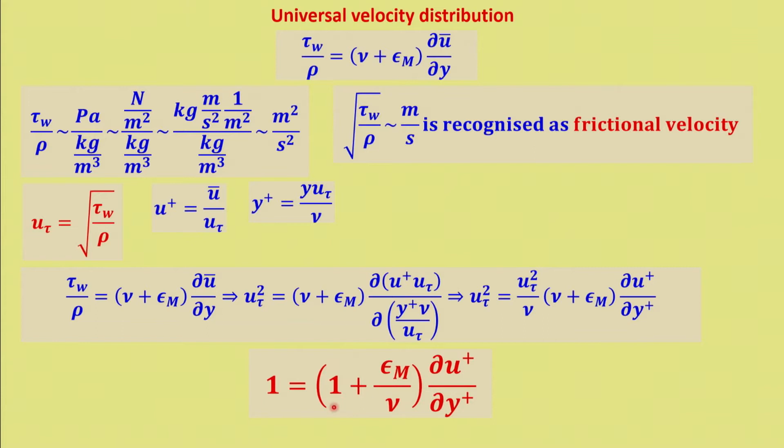Tau wall by rho equals nu plus epsilon m, del u bar by del y. So we replace tau wall by rho by u tau squared, and del u by del y in terms of u plus and y plus, and we got this relation. The first term represents the laminar shear stress and the second term represents the turbulent shear stress.

For laminar, we took a two layer assumption. We took the laminar sublayer and took 1 equal to du plus by dy plus, integrated that, and got u plus equal to y plus.

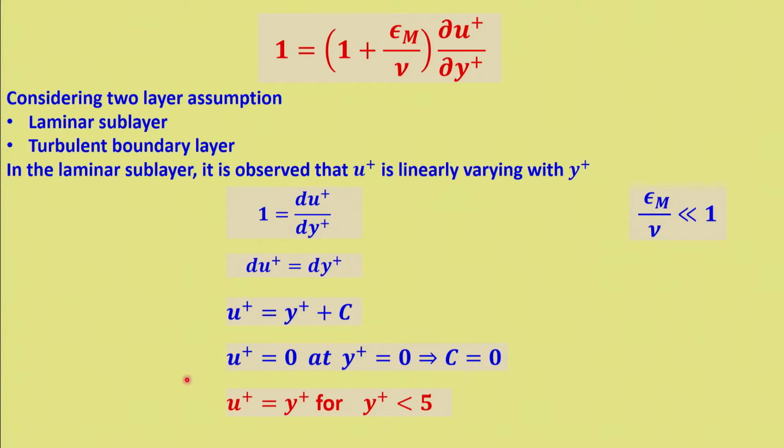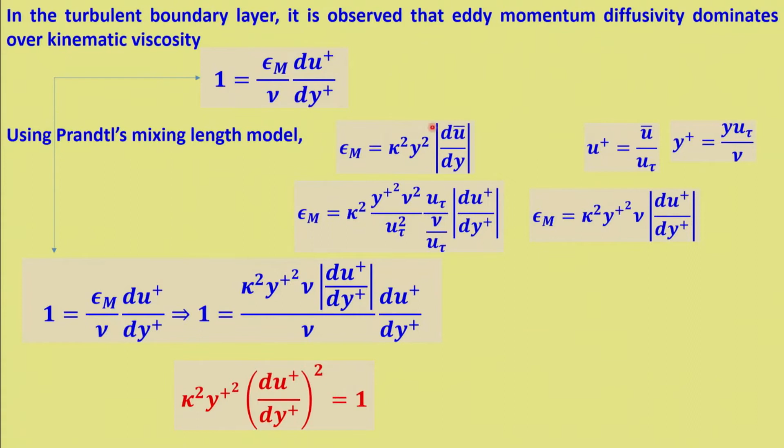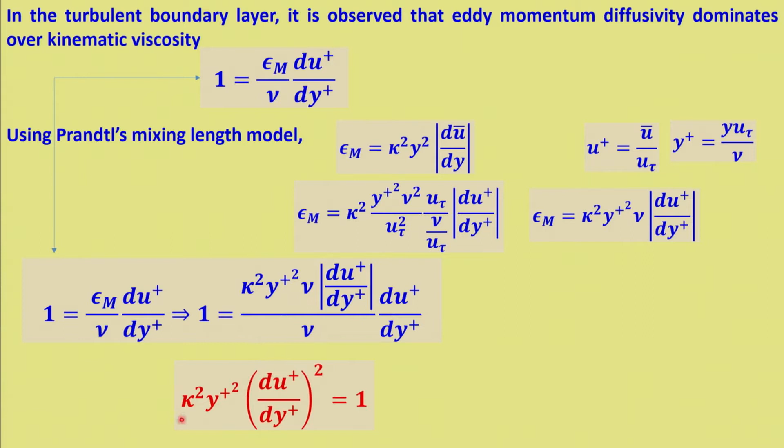For the turbulent boundary layer, we replaced epsilon m with Prandtl's mixing length hypothesis, that is, epsilon m equal to kappa squared y squared du bar by dy. Replacing that with y pluses and u pluses, we get kappa squared y plus squared nu du plus by dy plus. Substituting this epsilon m in the equation and rearranging, I get kappa squared y plus squared, du plus by dy plus whole squared, equal to 1.

If I take the square root, I get this equation, and integrating that, I get u plus equal to a log of y plus plus b, where 1 by kappa is termed as a. So if I take two layer, I get a equal to 2.5 and b equal to 5.5.

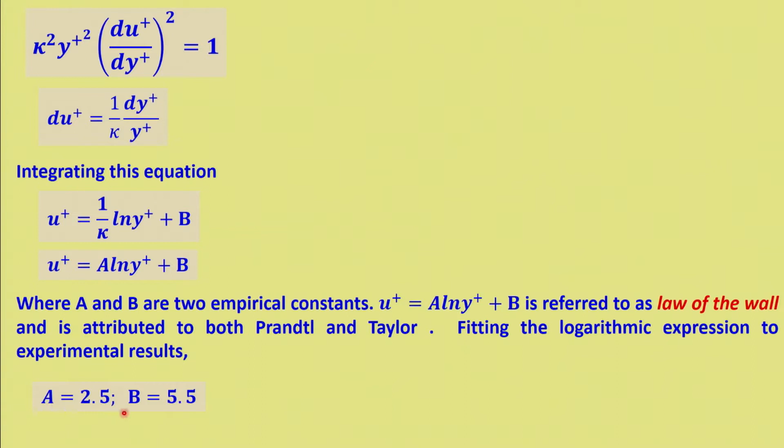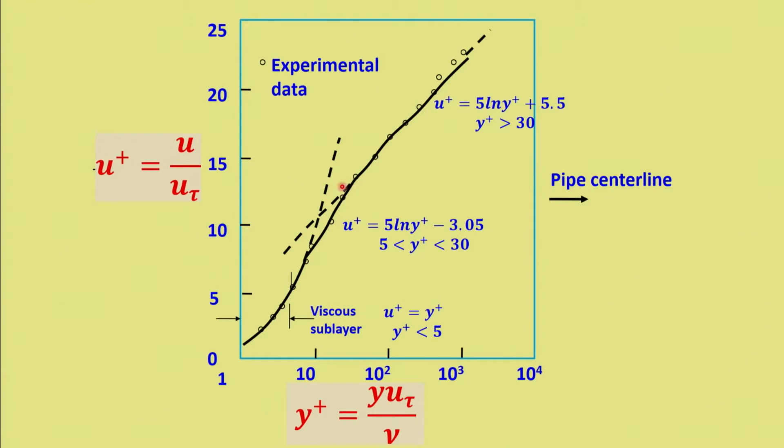This is called universal because it's valid for both internal and external flows. So Prandtl and Taylor suggested the 2 layer approach, and Von Karman refined this with the 3 layer.

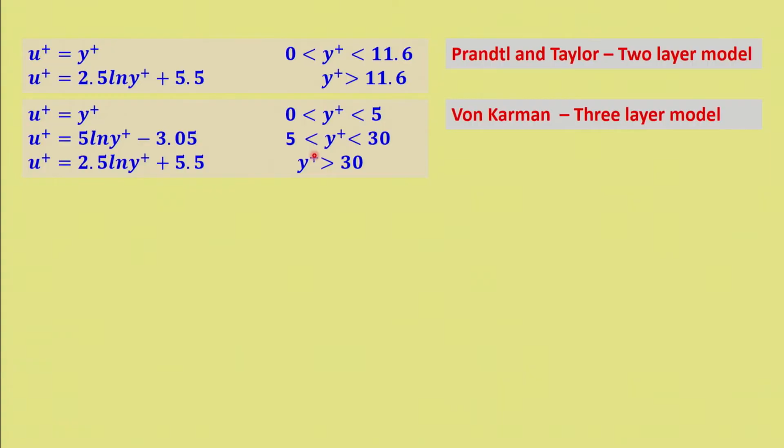In Prandtl's mixing length hypothesis, we said u prime is of the order of L del u bar by del y, and v prime is of the order of L del u bar by del y. So u prime v prime is of the order of L squared, del u bar by del y whole squared. Substituting that for epsilon m, L squared del u bar by del y whole squared equal to epsilon del u bar by del y, I get epsilon m equal to L squared del u bar by del y.

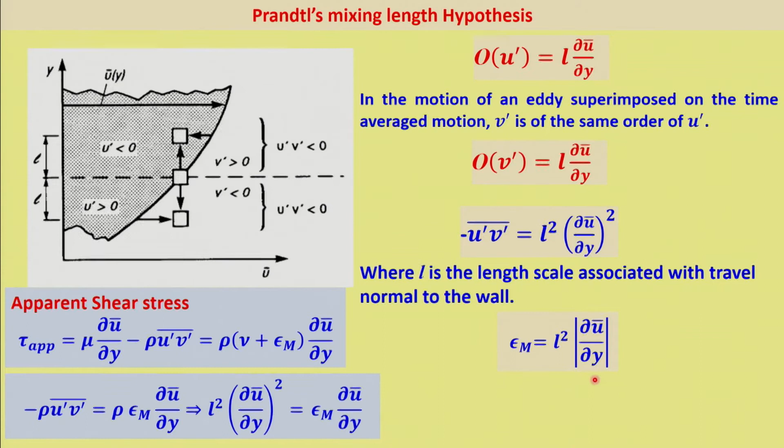What should be the scale for L? There is no general rule, but it should be of the order of y. So I write L equal to kappa y. Substituting that, for L squared I get epsilon m equal to kappa squared y squared del u bar by del y. From experiments, it turns out kappa is of the order of 0.4. This reconfirms the upper bound for the mixing length.

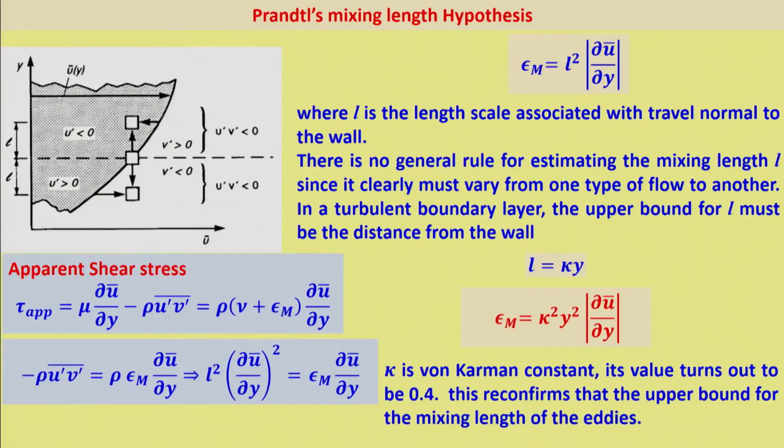Now let us see the plan for the next lectures in this module: we will try to derive the friction factor. Coming to the slides, the objectives of this lecture are to quickly take up laminar, transition, turbulent, developing and fully developed flow, briefly revisit universal velocity distribution, and derive the friction factor for turbulent flow in a hydraulically smooth pipe. That is the aim of this module.

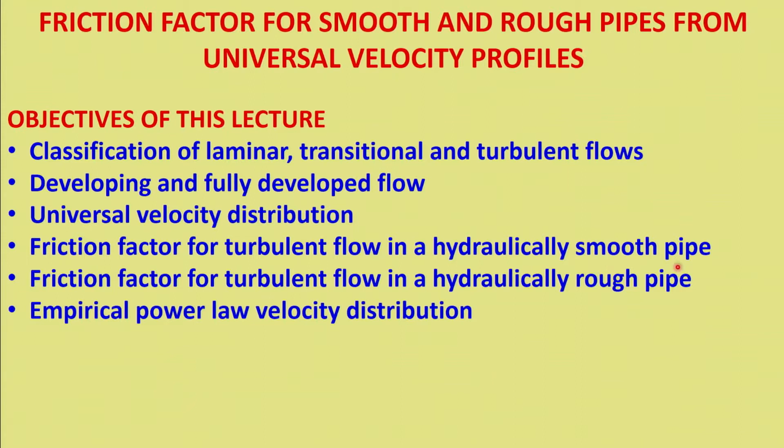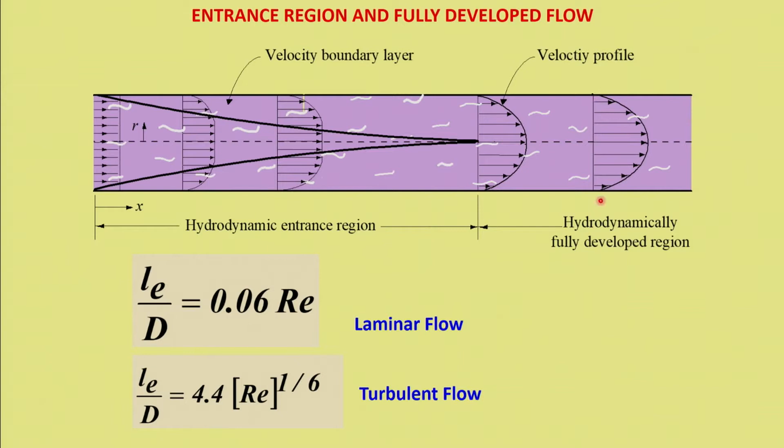So we have laminar, transitional, turbulent, and developing flow, where the boundary layer is growing until it reaches the center of the pipe—that is called the hydrodynamic entrance length. In the fully developed flow, if it is laminar, the profile would be parabolic. If it is turbulent, it would be a top hat profile or power law. So I am going to consider the turbulent velocity profile.

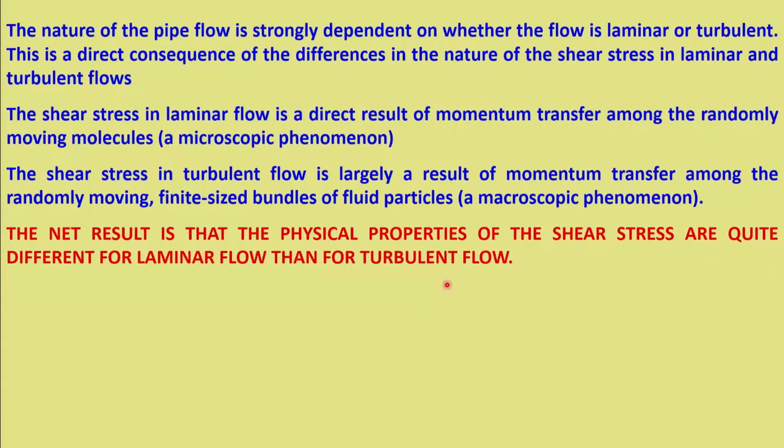In previous classes, Professor Arun taught you how to derive F equal to 64 by Re for laminar flow from the Navier-Stokes equations. So here we are going to derive F for turbulent flow. This is just to show the entrance length and the fully developed flow region where dp by dx is constant. The shear stress is quite different between laminar and turbulent flow.

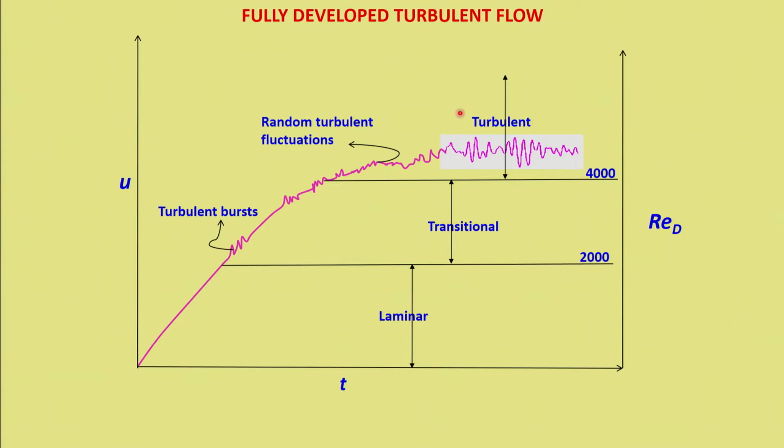This is just to show velocity versus time, where turbulent bursts are present, and in turbulent flow, for Reynolds number greater than 4000, the flow is going to be turbulent.

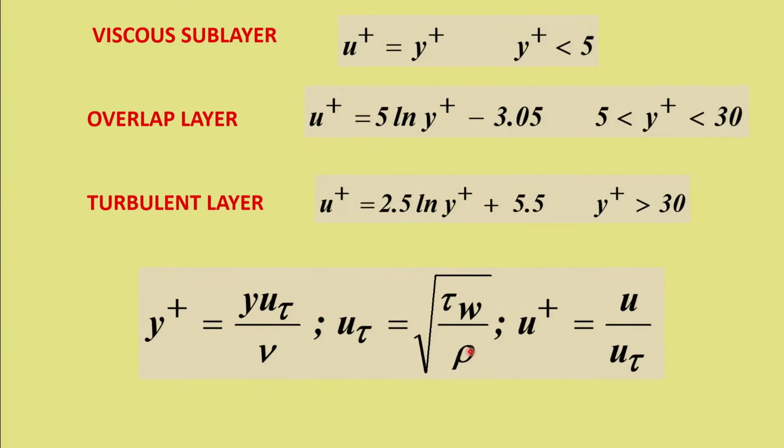So then we have gone through this universal velocity profile, and this was the universal velocity profile which we have taken up, and this we have compared with the experimental data.

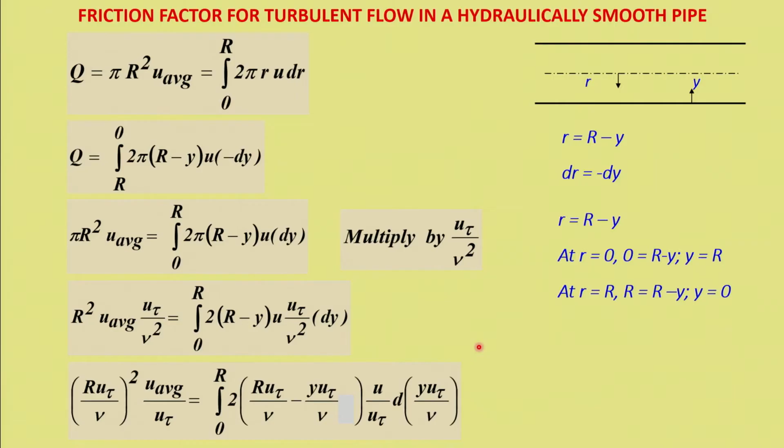Now we shall take up the friction factor for turbulent flow, friction factor for turbulent flow in a hydraulically smooth pipe. Of course, I have not told what is smooth pipe yet.

Let's consider that there is no surface roughness. For now, let us take this as smooth pipe means there is no surface roughness at all, like a perspex pipe or a glass pipe. I will define formally after this derivation what is hydraulically smooth and hydraulically rough pipe.

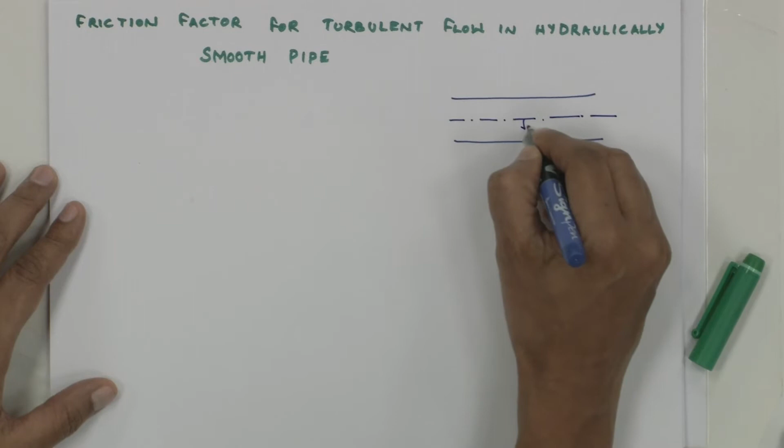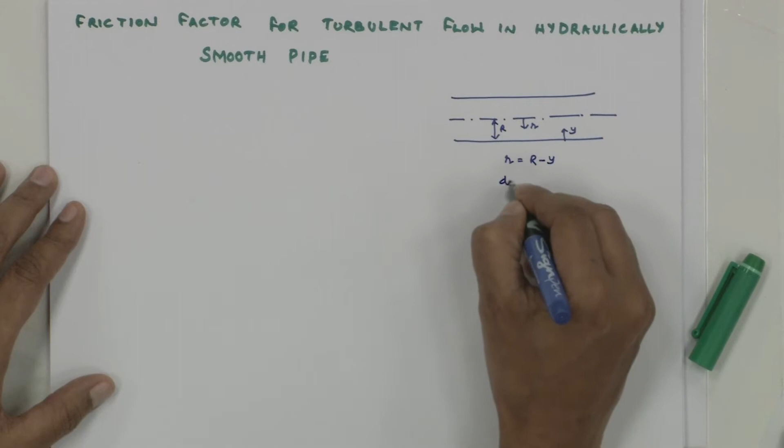So if I take a pipe, this is the R coordinate and this is the Y coordinate, and this is the radius of the pipe. Now R equals capital R minus Y, and dr equals minus dy. When R equals 0, that means 0 equals R minus Y, so Y equals R. And at R equals R, that implies Y equals 0. This is for transformation of coordinates.

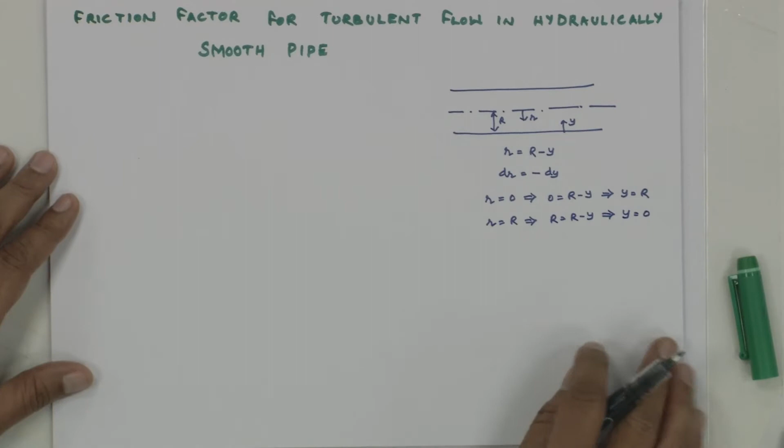I have written this. So now flow rate Q dot equals pi R squared U average, area into velocity. This is volume flow rate, volumetric flow rate is what I have taken, that's why density you don't see. This is equal to the integral from 0 to R of 2 pi R U dr. How did I write this?

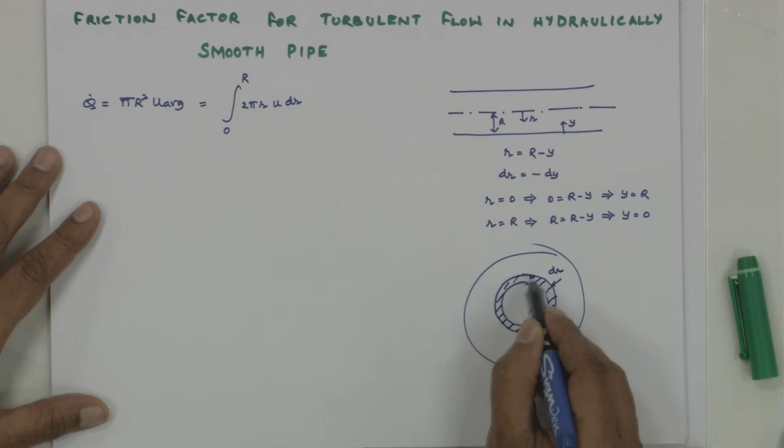I have taken a small elemental ring in my pipe at a radius R. This elemental ring is having a thickness dr. So the area of this elemental ring is 2 pi R dr multiplied with my velocity, integrated within the limits 0 to R, gives my flow rate.

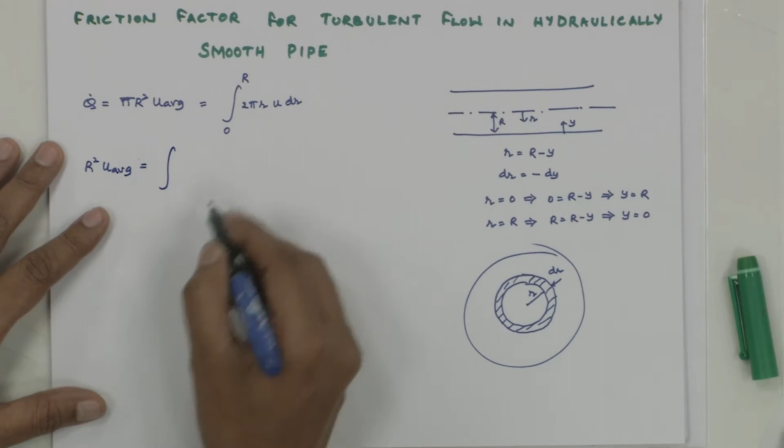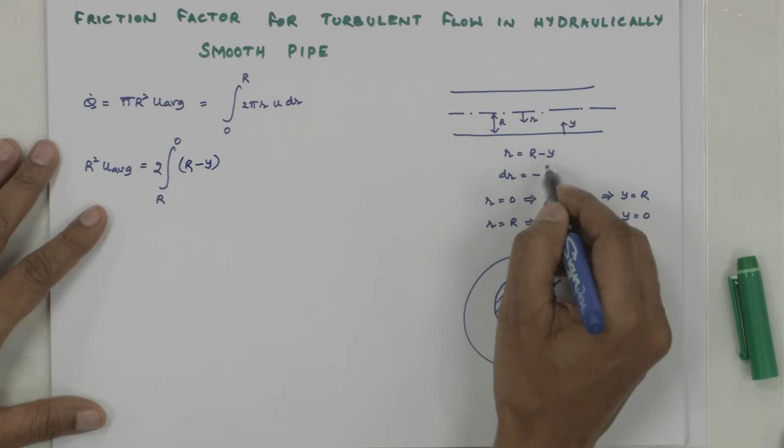Now R squared, pi gets cancelled out, so you have R squared U average equal to the integral, and I am transforming this R into Y. So when R is 0, Y is R, and when R is R, Y is 0. I am pulling out the 2, U I retain as it is, small r becomes capital R minus Y as I have shown already, and dr is minus dy. I will absorb this negative sign by flipping these limits. So R squared U average equals 2 times the integral from 0 to R of (R minus Y) U dy.

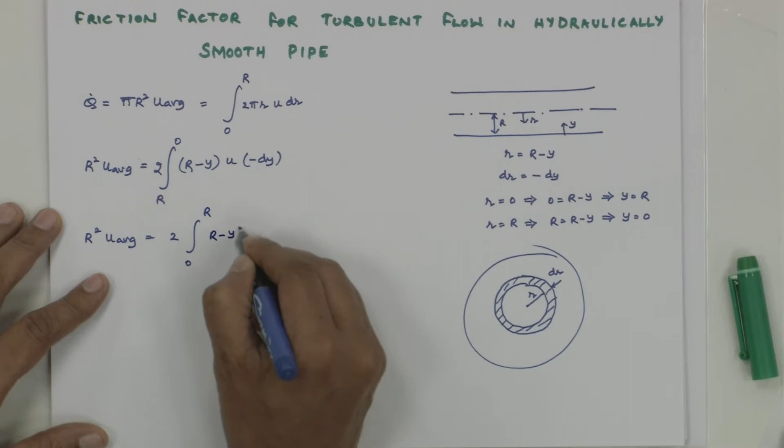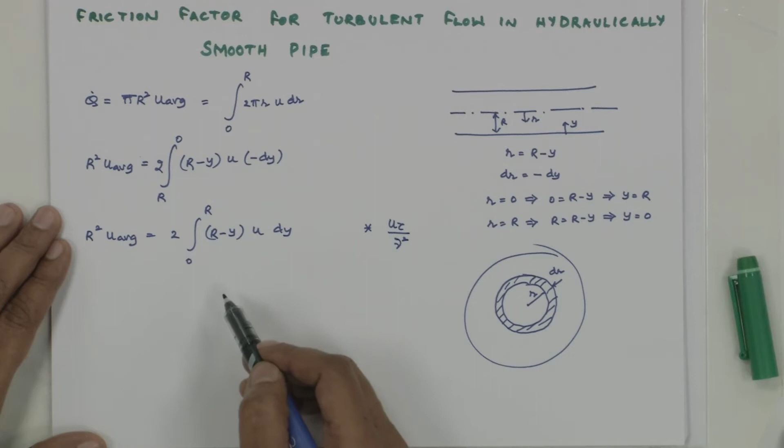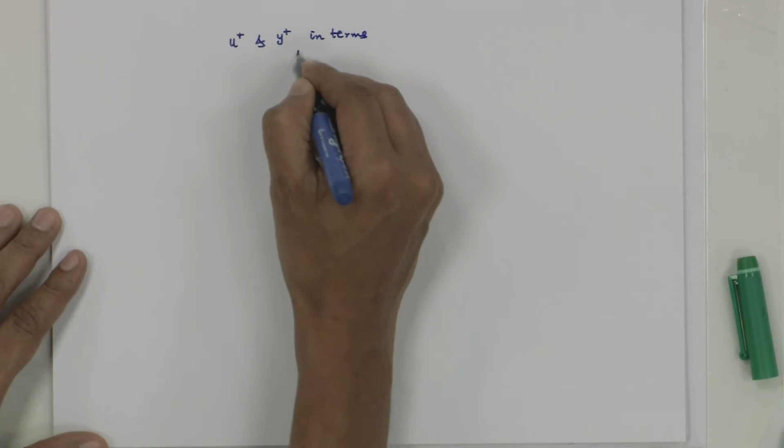Now multiply both sides by U tau by nu squared. My next aim is to convert this, transform this in terms of U plus and Y plus. Let me tell you what I am doing. I will convert this into U plus and Y plus.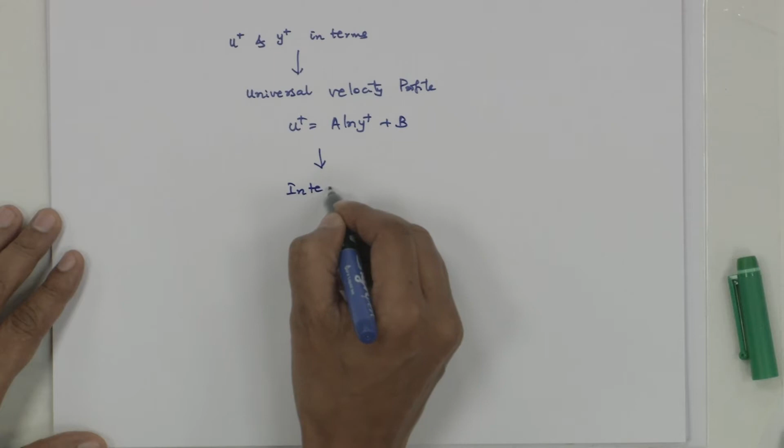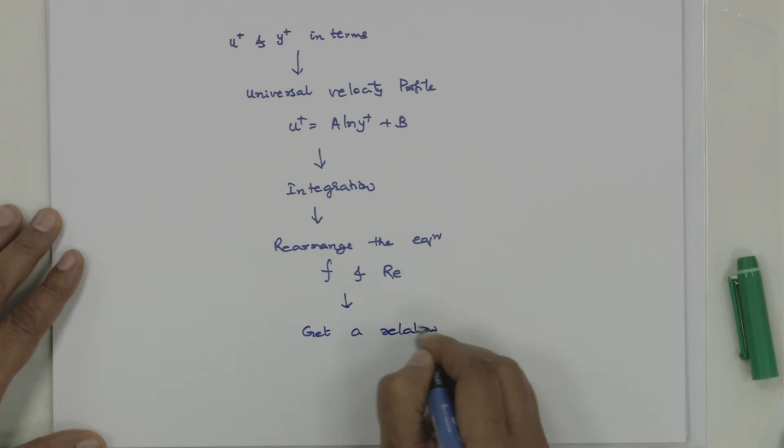In terms of U plus and Y plus I will write, and take the universal velocity profile, that is U plus equals A log of Y plus plus B, do the integration, rearrange this equation in terms of F and Re. F is friction factor, F and Re, so that I get a relation for F. This is my whole algorithm, if you want to say, what I am following to derive this.

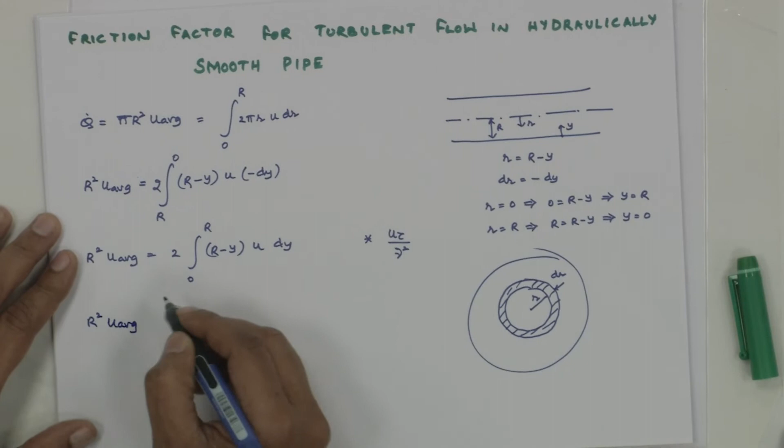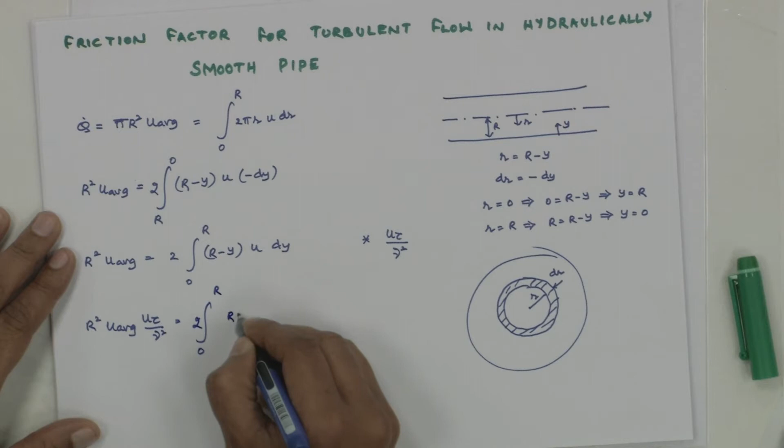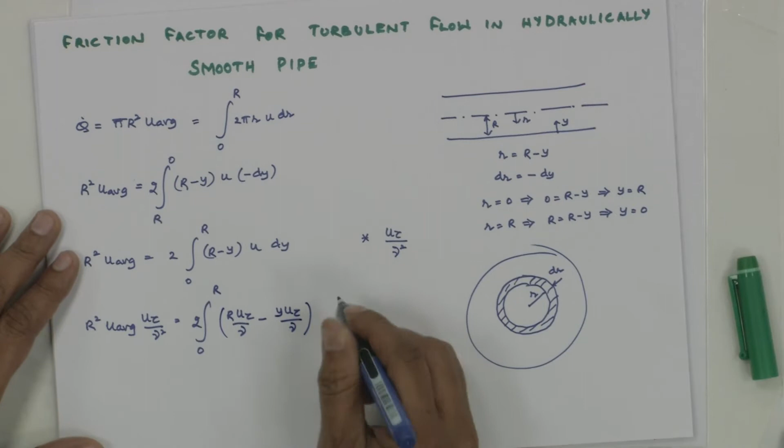Getting back, so I want to write this in terms of U plus, so that's why I am doing a little bit of rearrangement. So R squared U average U tau by nu squared equals the integral from 0 to R of 2 outside, R U tau by nu minus y u tau by nu, into u by nu dy. Let it be there like this.

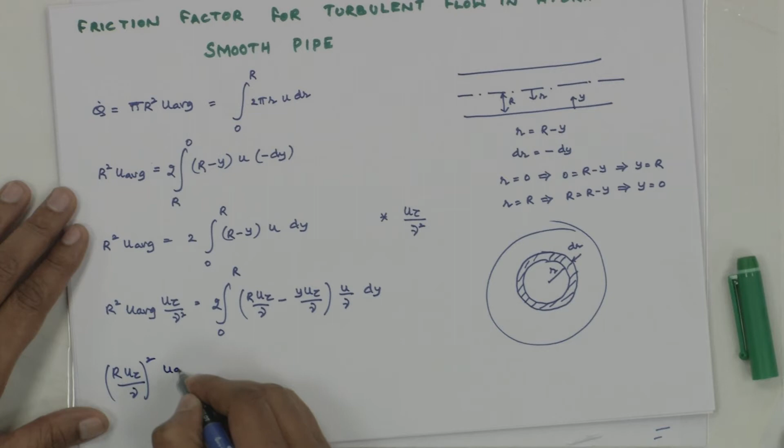Okay, now again, R u tau by nu whole squared. So I have to divide by u tau. You see, I had only one u tau in the numerator, but I have put two u taus in the numerator. That means I have to put one u tau in the denominator.

So this is equal to 2 times the integral from 0 to R of (R u tau by nu minus y u tau by nu) times (u by u tau) d of (y u tau by nu). What did I do? This u tau is constant, so this u tau gets cancelled out, nu was there, that nu I have pushed inside. So everything is okay.

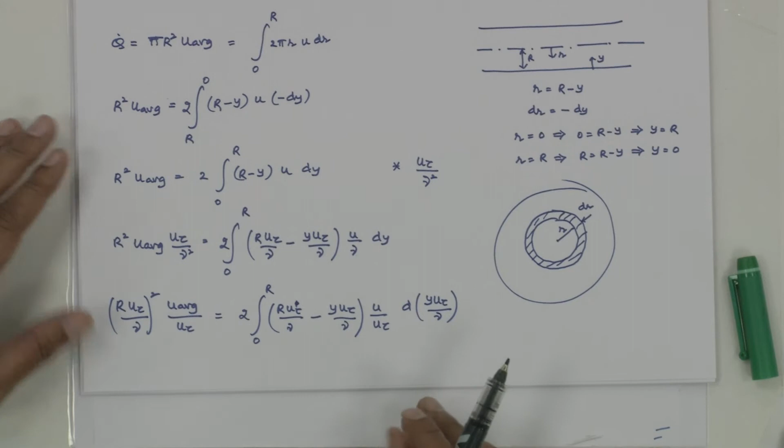Now you can see everything in terms of pluses. So if you recall, what is y plus? Y plus equals y u tau by nu, R plus equals R u tau by nu, and u by u tau is u plus.

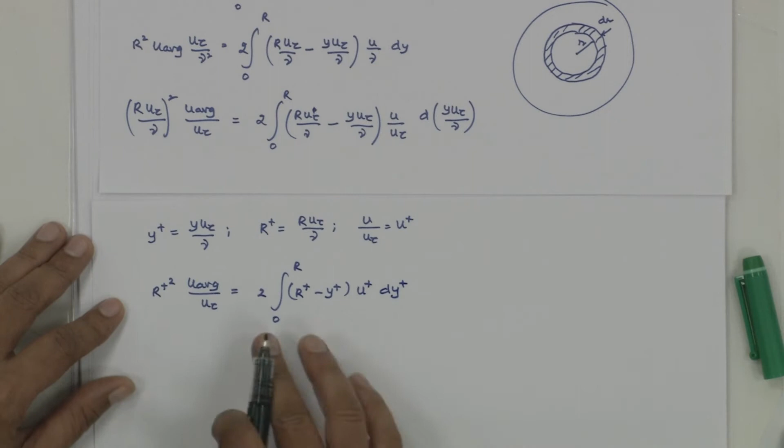Substituting this, what do I get is R plus squared u average by u tau equals 2 times the integral from 0 to R plus of (R plus minus y plus) u plus dy plus, where u by u tau is u plus, and y u tau by nu is y plus. So I have successfully converted this within the integral as all u plus and y plus only. So what was u plus? U plus equals A log of y plus plus B, where A equals 2.5 and B equals 5.5.

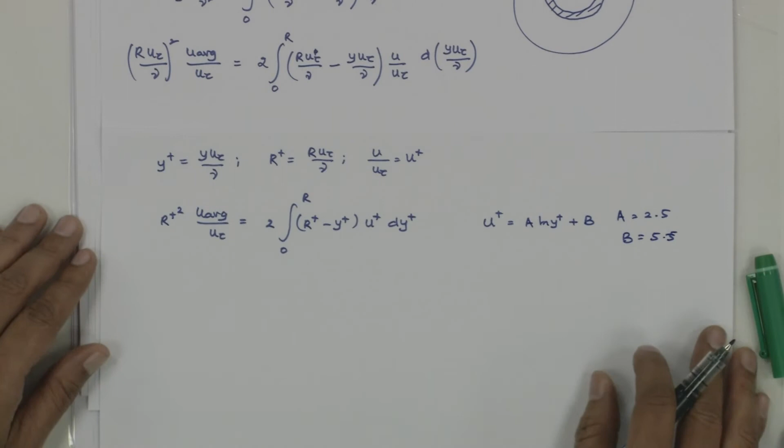Let me keep it as a and b for now, and substitute the values of a and b at the end. Now R plus squared u average by u tau equals 2 into the integral from 0 to R plus of (R plus minus y plus), where u plus is a log of y plus plus b, dy plus.

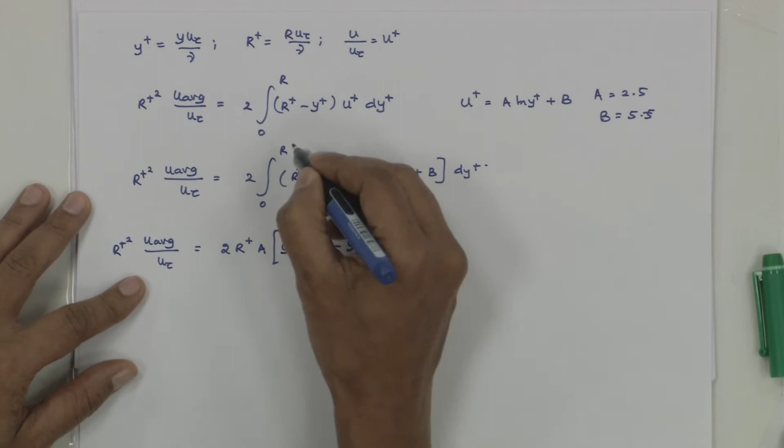Now you multiply this out. There is a little bit of bookkeeping, but let's do it, I don't want to skip steps. R plus squared u average by u tau equals 2R plus a. If you integrate log x, you get x log x minus x plus c, so you have y plus log of y plus minus y plus within the limits 0 to R, and notice this limit becomes R plus.

Minus 2a. Now for the x log x integration, you get 2a into y plus squared by 2 log of y plus minus y plus squared by 4. Notice this is the integration of y plus log y within the limits 0 to R plus.

2b R plus y plus, because you have only dy plus, so you get y plus within the limits 0 to R plus, minus 2b times the integral of y plus dy plus, which becomes y plus squared by 2, from 0 to R plus. It's simply bookkeeping, but I don't want to skip it because there are subtle nuances in between, so I need to focus on that.

So R plus squared u average by u tau equals 2R plus a into R plus log of R plus minus R plus, minus 2a R plus squared by 2 log of R plus minus R plus squared by 4, plus 2b R plus squared minus 2b R plus squared by 2.

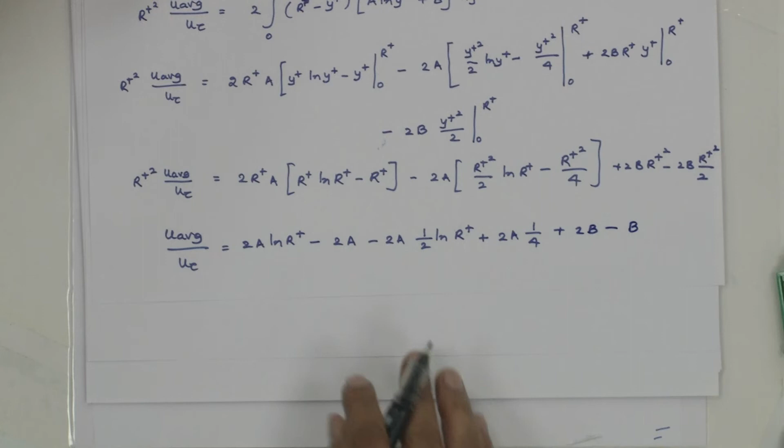So I get my equation as u average by u tau equals 2a minus a log of R plus. So you get a log of R plus minus 2a plus a by 2, so you get minus 3 by 2 a plus 2b minus b, you get plus b.

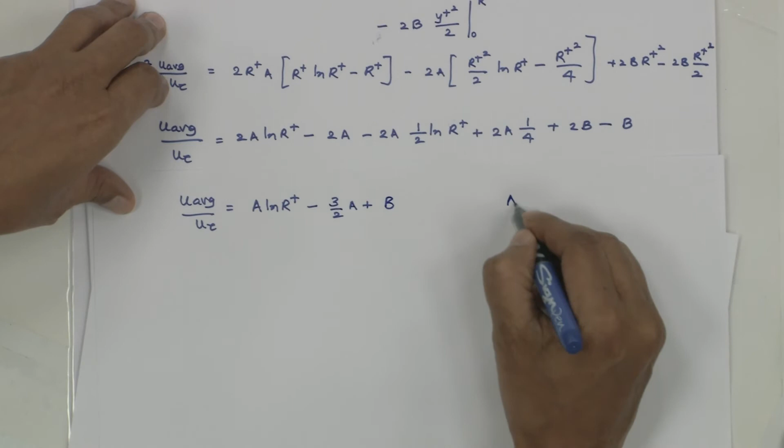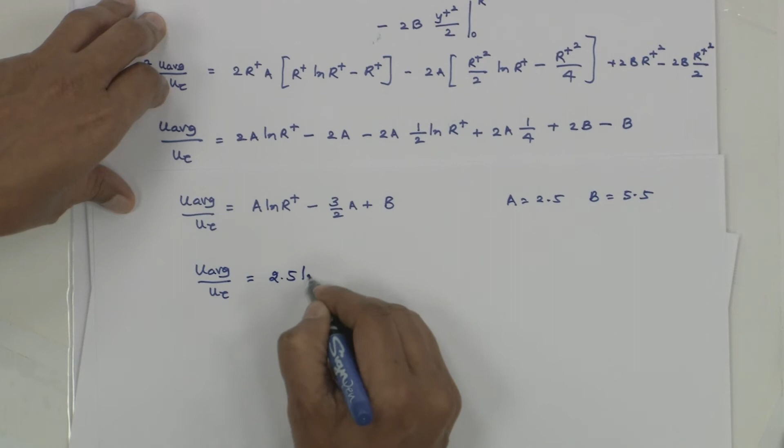Substituting a equal to 2.5 and b equal to 5.5, you get u average by u tau equal to 2.5 log of R plus 1.75. You just substitute for a and b, and you get this 1.75.

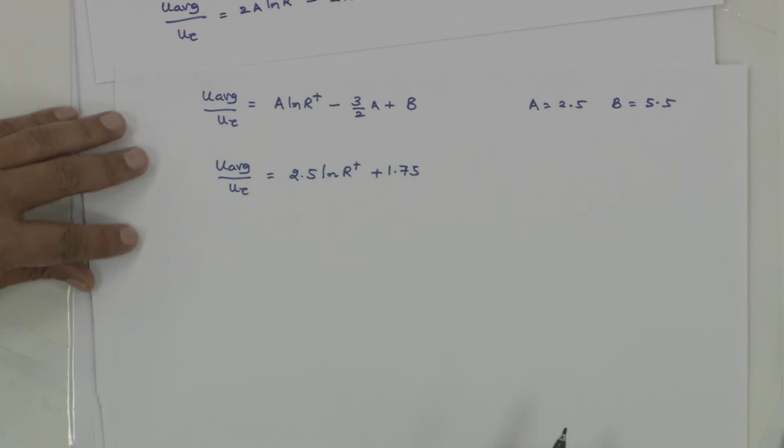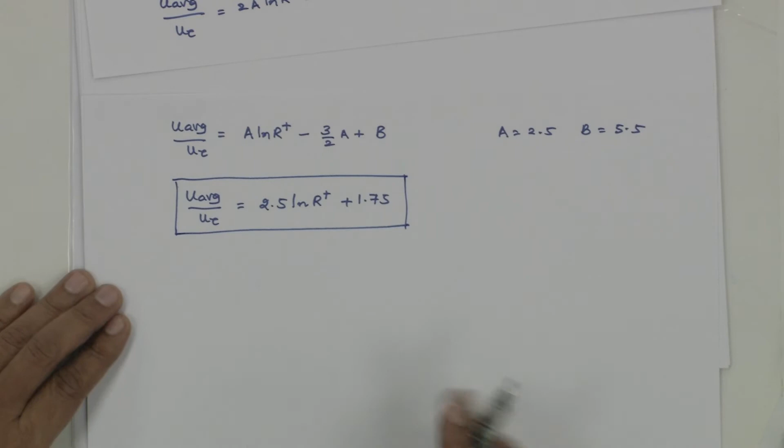Now still I am not seeing Reynolds number and friction factor, right? So let me take up only the left hand side of this equation, that is u average upon u tau. u tau is nothing but square root of tau wall by rho, so now 1 upon square root of tau wall upon rho u average squared.

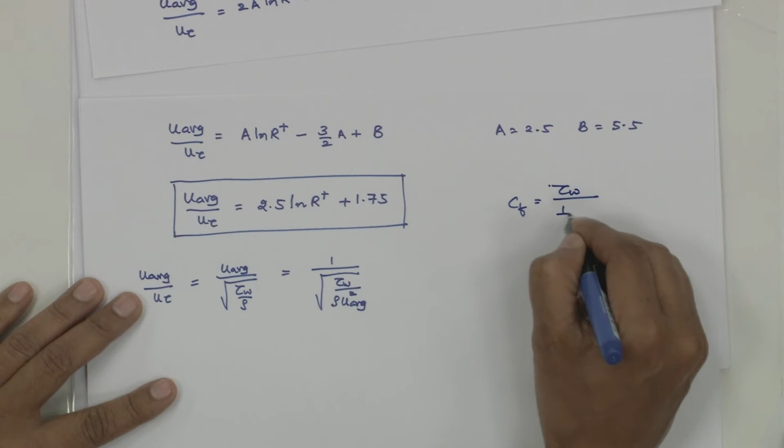I have just taken u average in the denominator. So if you recall, Cf equals tau wall upon half rho u average squared, that is my definition of Cf.

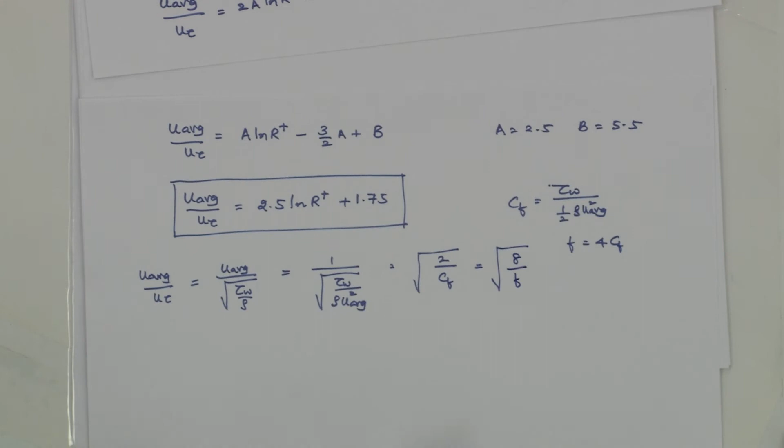So that means this becomes square root of 2 by Cf. Since tau wall by rho u average squared equals Cf by 2, and f equals 4 Cf, if you substitute that, you get 8 upon f. This is my regular friction factor which comes from my Darcy-Weisbach equation.

If you want to recall, Hf equals f L V squared divided by 2 g d. So that is rho g Hf, that is delta P, equals rho g f L V squared divided by 2 g d. Here V is nothing but u average, so g cancels out, and you get f equals delta P upon half rho u average squared into d by L.

This is the friction factor definition, if you have forgotten. So the left hand side of this equation, if I take it, has become square root of 8 by f equals

2.5 log of R u tau by nu plus 1.75. So square root of 8 by f equals 2.5 log of 2R u average by nu into u tau by 2 into u average. I just multiplied and divided it by 2 u average. 2R is nothing but my diameter.

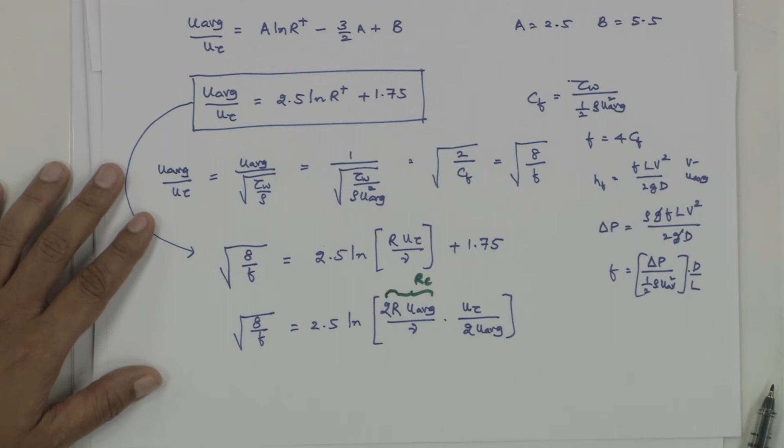Whole of this is nothing but my Reynolds number based on diameter, and u tau by u average, just now we have found, is square root of f by 8. So if I substitute that, I get square root of 8 by f equals 2.5 log of Re into half into square root of f by 8 plus 1.75.

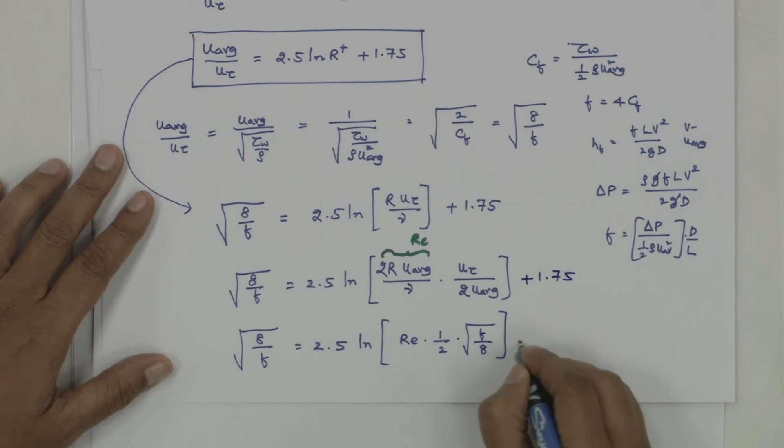So if I divide throughout by root 8, since I want only 1 by root f on my left hand side, I get 1 by root f equals 2.5 upon root 8 log of Re into half into square root of f by root 8, plus 1.75 by root 8. So if you do this, you get 1 by root f equals 0.8838 log of Re square root of f plus 2.5 by root 8 log of 1 by 2 root 8.

I have just taken out these constants, log a plus log b. Log ab equal to log a plus log b, I have just put that, plus 1.75 by root 8. So you get 1 by root f equal to

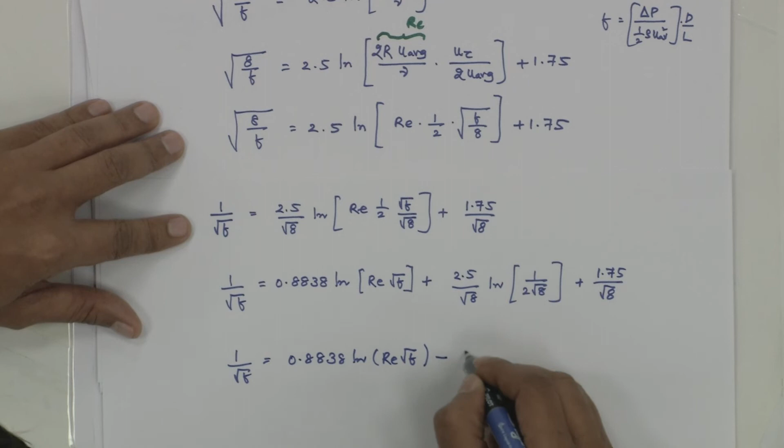0.8838 log of Re root f equal minus 0.9129. That's what you are going to get. Okay, so now

minus, when you take log, you will get this. Where did the minus come from? It comes from log, so you don't have to be worried.

But now I want to convert this natural log to logarithm to base 10. So log base e of b equals log base 10 of b divided by log base 10 of e. If you do that, you get 1 by root f equal to

2.035 log of Re root f minus 0.9129. Now this equation, if you just fine tune with Prandtl's experimental relation, you get Prandtl's experimental relation.

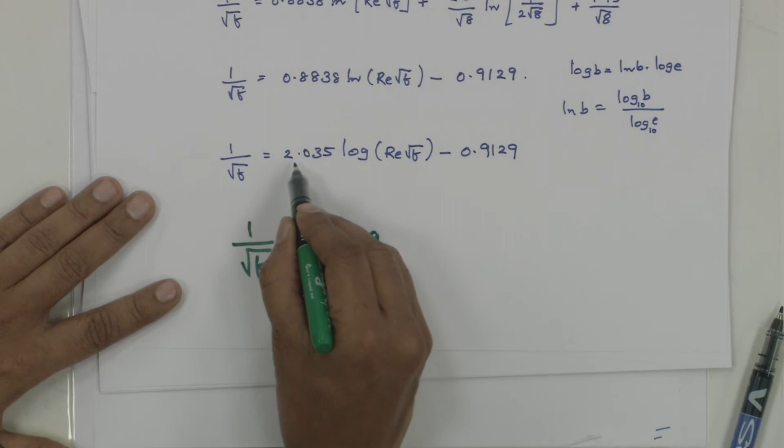Prandtl did that and fine tuned this 2.035 as 2, and wrote that as log of Re root f, and minus 0.9129 as 0.8. This works beautifully well and compares with the experimental results, and this is called Prandtl's

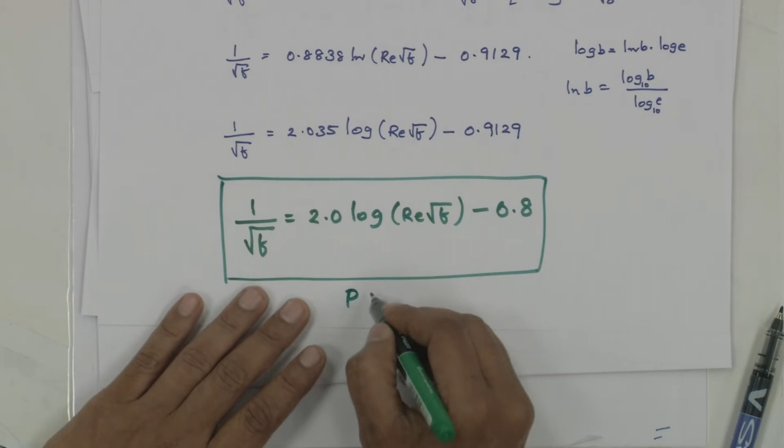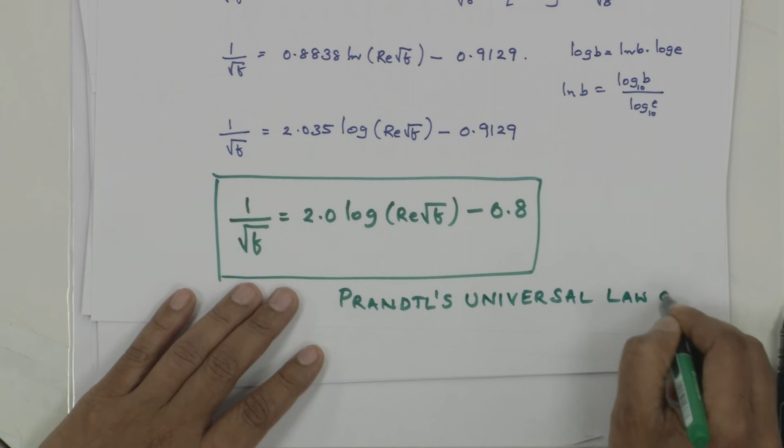universal law of friction, because it is coming from the universal velocity profile, and it has been verified up to 3.4 into 10 to the power of 6 Reynolds number.

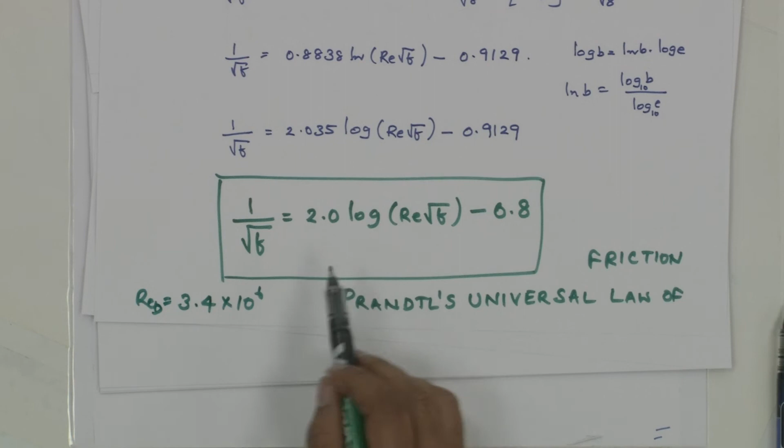It can predict well. Only thing is that this is implicit, meaning f is there both on the left hand side and right hand side. You have to solve it by trial and error. However, it works very well.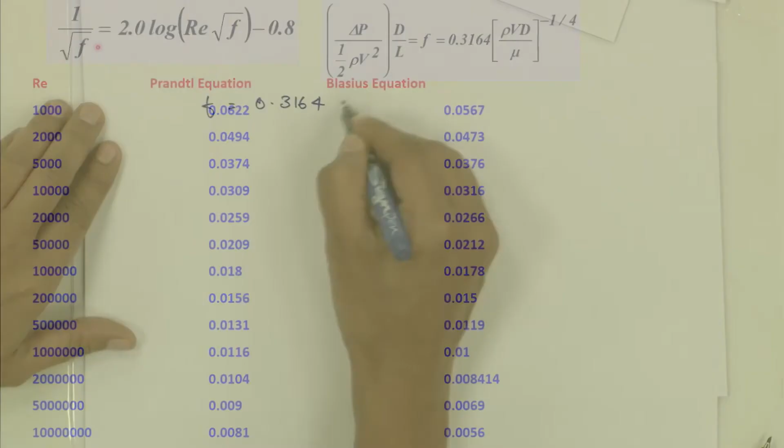It works very well. So now if we come to the slides, Blasius on the other hand just did a simple curve fit, that is f equal to 0.3164 Red to the power of minus 1 by 4, where Red is u average d upon nu.

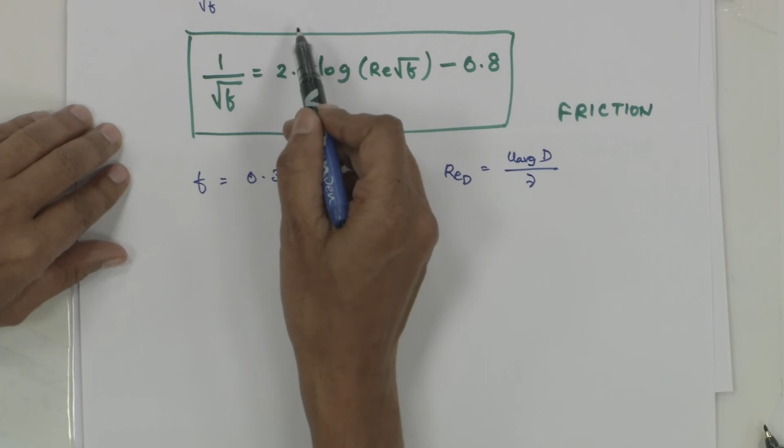Okay, so you have two equations. One is the implicit, which is derived from fundamentals. Of course, that is also semi-empirical, and this is purely empirical. Purely empirical. This is semi-empirical.

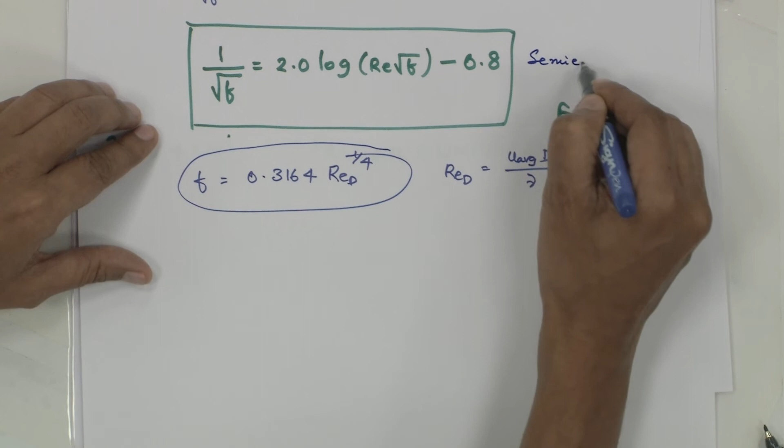This is purely empirical. If you see the slides and the comparison of the data, Prandtl's equation and Blasius's equation, they are almost same. They are comparing well. Prandtl's equation compares with Blasius's equation. Of course, Blasius's equation will have experimental uncertainty.

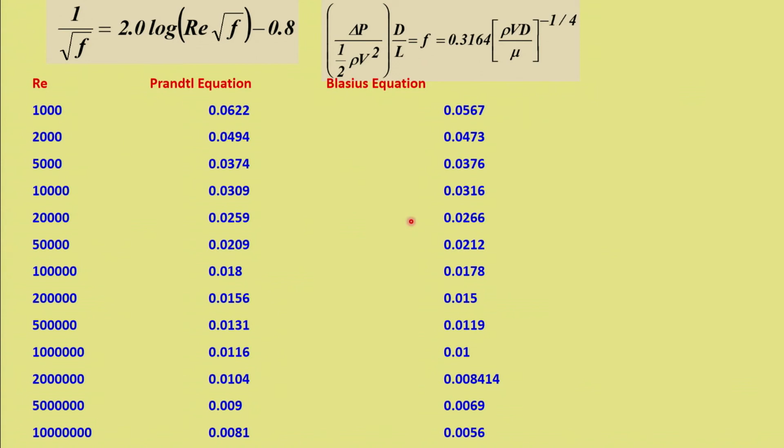We need to remember that, and it works very well. So we just recall, Prandtl's universal equation agrees well with Blasius's equation up to Reynolds number of 1 lakh, but at higher values Blasius's equation deviates progressively from the measurements, while Prandtl's equation maintains good agreement.

Blasius happens to be the PhD student of Ludwig Prandtl. In fact, the similarity hypothesis you have studied for the flat plate was his PhD work, and Nikuradse did all his experimental results for hydraulically smooth and rough pipe, based on which this Prandtl's semi-empirical relation was compared,

and these constants 2 and 0.8 were fine-tuned. So I would strongly recommend you read these two papers, by Hager, 'A Life in Research and Education' on Blasius, in Experiments in Fluids, and again by Hager on Nikuradse, 'Hydraulic Experimenter', in the Journal of Hydraulic Research. I would request you to read these two papers and encourage your students to read them, because it gives the historical perspective of how things have emerged and how we are reading and understanding today.

Interestingly, in 1998 at Princeton University, they redid all these experiments and compared this universal velocity profile, and found that these constants just have to be fine tuned to extend it, not just from 3.4 into 10 to the power of 6 but to 35 into 10 to the power of 6, changing these constants to 1.92 and 0.475, with minus 7.05 upon Red into root f.

So this extends Prandtl's data beyond 3.4 into 10 to the power of 6, and this equation predicts the experimental data within 1.4%. For more details, you can read these two papers. One is a JFM paper, Journal of Fluid Mechanics. Another one is also a JFM paper, presented by McKeon, Zagarola and Smits.

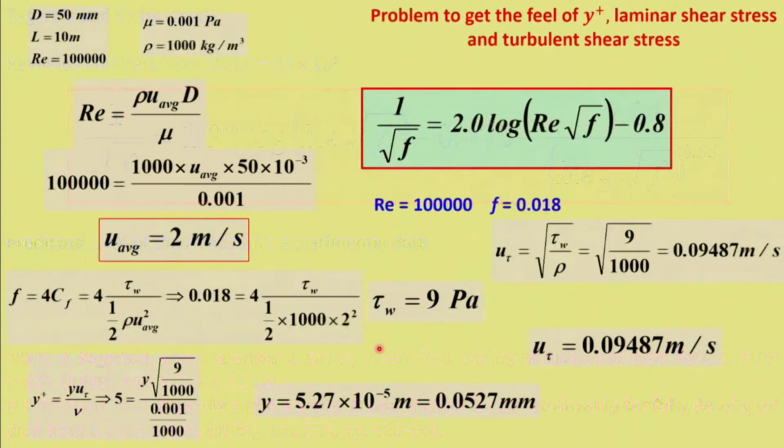So these two papers I would strongly recommend you to read, and in the next module I will explain what is hydraulically smooth and hydraulically rough, and then we will derive the friction factor for the hydraulically rough pipe as well. With that module we would complete the utility of this universal velocity profile with the integral parameter, that is the friction factor F. Thank you.